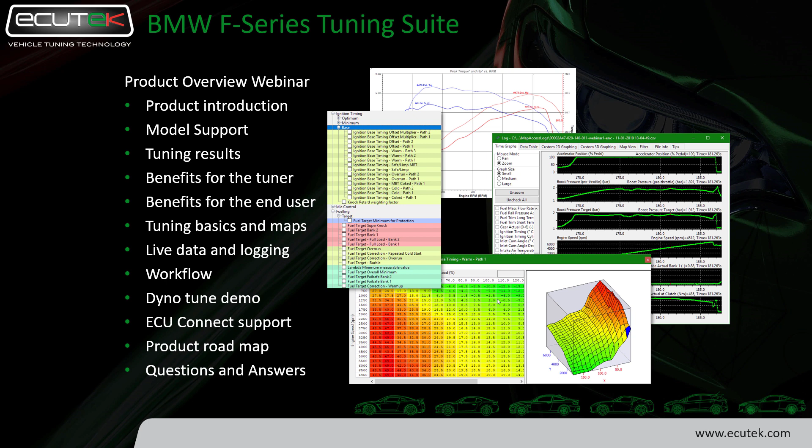So what we have is a complete all-in-one tuning solution for the F-Series fitted with the N55 and S55 six-cylinder engines, combined with the Bosch MEVD 17.2.6 and MEVD 17.2.G ECUs from 2011 onwards. The tool features ECU unlocking, ROM editing, ECU programming, log creation, log analysis and diagnostic features in one tool. We've given you clearly defined maps for tuning the cars, comprehensive 2D and 3D map editing tools. We support remote or e-tuning.

A comprehensive library of stock ROMs is available for automatic download when you install the software. You can import your existing tuned ROMs by importing the files directly or reading them from the ECU. We can compare and copy maps between ROMs. And obviously, we have a robust programming process with built-in ECU recovery should programming be interrupted.

The tuning suite supports a wide range of cars from the worldwide market, ranging from the M135i at the smaller end up to the barge-like 640. It also includes fringe models like the GT and X-Drive 35i, and obviously the halo cars such as the M2, M3 and M4 with the S55 twin-turbo engine.

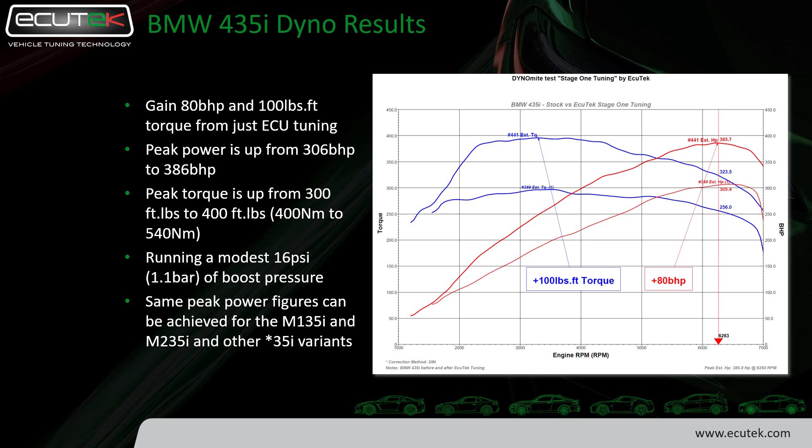On our 435i development car, we found excellent gains even in stock form. 80 horsepower and 100 foot-pounds of torque just from ECU tuning, with peak power increasing to 386 horsepower from the stock 306. Peak torque's up to a very respectable 400 foot-pounds, and we're still only running a moderate 1.1 bar of boost at peak. Typically you'll find that the same peak figures can be achieved on most of the variants, so on those cars that start off with more power from the factory, we'll have a smaller gain.

You can start tuning your first BMW F-Series within an hour of purchasing the software. If you're an existing dealer and you've already got one of our green hardware cables, you can just buy it in the web store, download the software, download the ROMs, and get going. It really is that easy.

Existing EcuTek tuners will be familiar with our all-in-one tuning approach. It's a single application that handles ROM editing, programming, logging, and OBD tools. So there's no binary file conversions, there's no hunting around with a hex editor. We can import common ECU formats for BMW from other tools. We can read the calibration data directly out of the ECU. When it goes to program, there's no messing around with checksums, that's all handled automatically. And if you're tuning the car in person, things like map tracing can make your life a lot easier.

As an EcuTek tuner, there's comprehensive email and telephone support available. As with all of our software, we provide all the stock ROMs that you need. They're stored locally and updated automatically. Tuning can be carried out 100% offline. You don't need internet access to actually tune the car, just to receive the updates.

If you're an existing EcuTek tuner, BMW F-Series is the ideal platform to start a remote tuning business. ROM files are encrypted and can be locked to a VIN or hardware license key. We update ECU security to prevent overprogramming or reading via OBD, and the programming sequence is also encrypted to prevent ROMs from being sniffed over the CAN bus during programming.

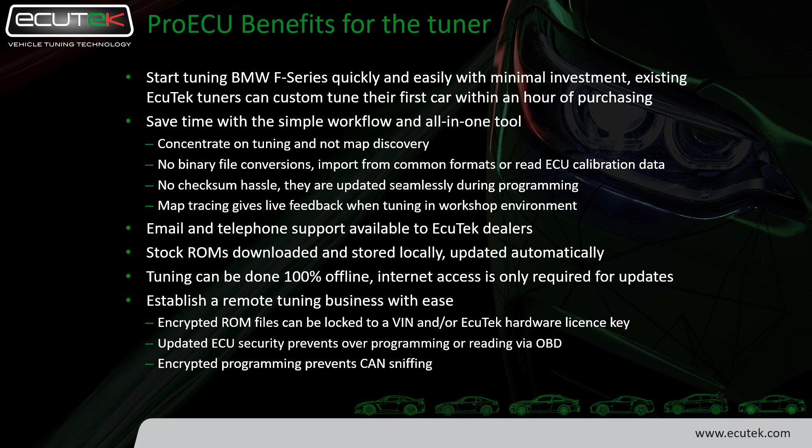If you or your customer are lucky enough to have one, then investing in EcuTek could be a great next step. They're a really good car out of the box, but with mild upgrades, they become excellent. Our M235i development car is such a good car with just a stage 1 upgrade. If you add to that some basic hardware updates, 420 horsepower isn't out of reach, and then the lighter weight 235i and 135i really compete with the M cars as they come from the factory. The already excellent M cars can be pushed to another level with just a stage 1 upgrade and even bigger improvements when you add some more hardware.

Using EcuTek, you can program a tuned ROM without invoking any tamper DTCs or changing the CVN. ECU Connect adds logging and basic diagnostic tools that can be used to validate the quality of your tune, allowing end users to build a relationship with their tuner by sending logs back and getting further map updates. As EcuTek adds RaceROM special features to its products, end users can benefit by getting updates through the lifetime of their car, and furthermore, the ECU can be completely returned to stock with minimal fuss.

The BMW ECU has a complex torque control strategy around which most of the other strategies are hung. Even things like the variable valve timing are driven by torque when you drill down. In this modern world, I'd really encourage any tuner that wants to do great work to embrace some of the modern ECU technologies. It's time to move on from thinking about only wide open throttle boost, a near fixed AFR and dumb ignition control. Let me take you through some of these maps in the initial release of ProECU.

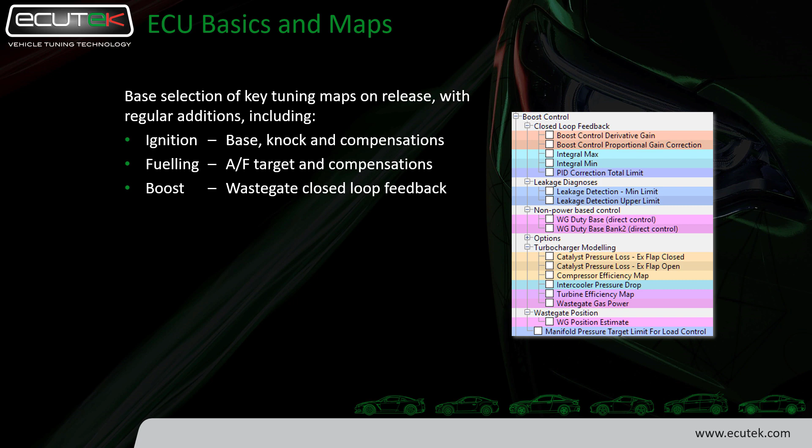So you can see that we've got ignition base timing for a number of different conditions. We've got some minimum ignition maps, and there are other compensations not shown on the screenshot on the right. Fueling, we've got basic AFR target and target compensation maps. The boost control is relatively easy to get your head around. There are some modelling based maps that you can use to influence how the boost is controlled to hit the target, but the target is largely driven by torque.

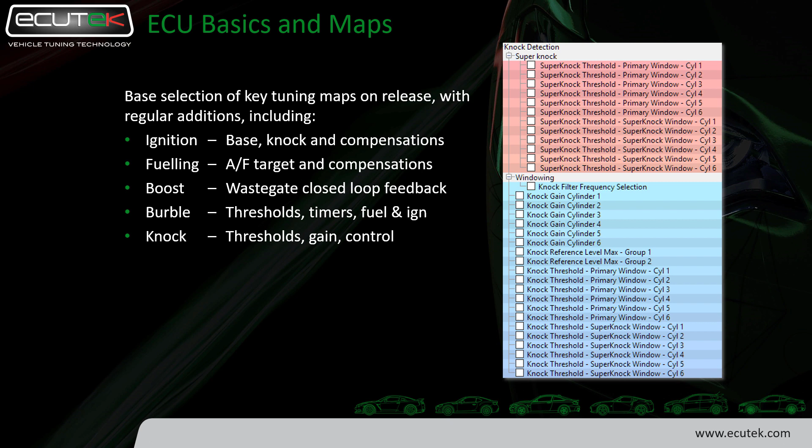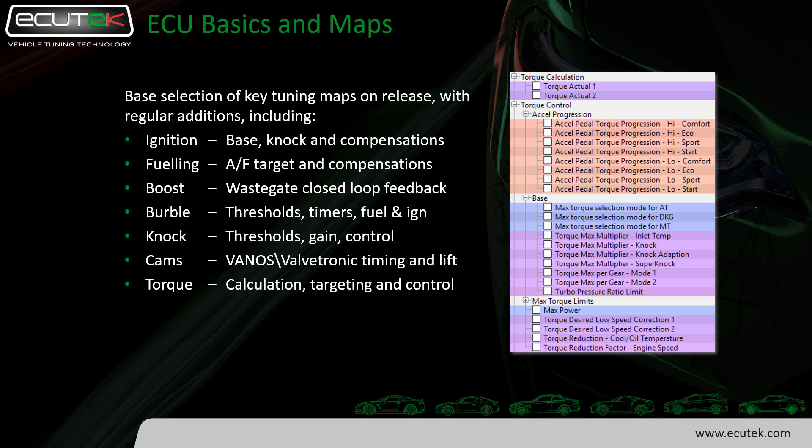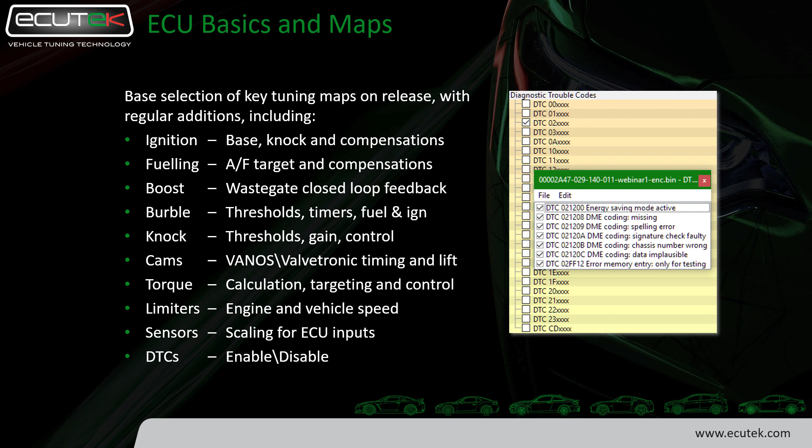Of course, there's everyone's favourite, the burble maps for pops and bangs. There's a good selection of knock detection and knock control maps. Cams are adjustable for both timing on the inlet and exhaust and lift on the inlet. Torque control is relatively straightforward on the BMW. There are a few maps that set the base demand, and then again the same concept of having compensations or adjustments to that base level. There's a standard selection of rev limits and speed limits, and we've also got some sensor scaling, and lastly a comprehensive table of DTC codes that can be switched on or off.

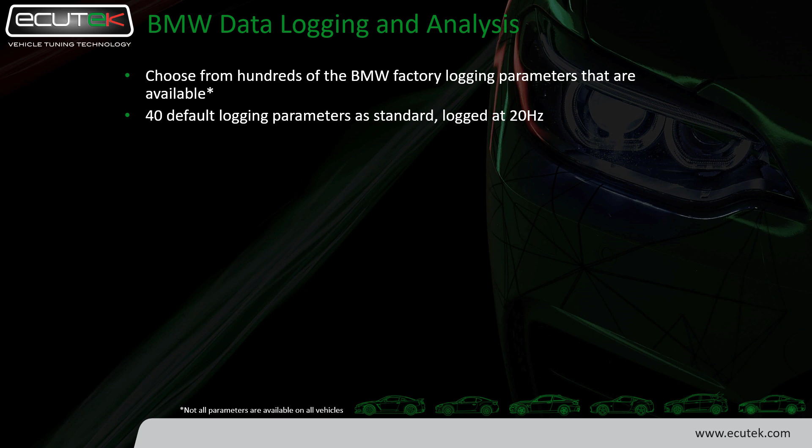As I mentioned before, as part of the all-in-one nature of this tuning solution, data logging and analysis is included. There are hundreds of parameters available, but obviously not all of the parameters are useful for tuning. So we've selected 40 default parameters as standard, and we typically get about 19, 20, 21 Hz of logging speed with that. You can data log using ProECU and a laptop, or using an iOS or Android device in our ECU Connect app. If you're using the app, it's very easy for end users to log the car and email the log straight back to the tuner without going anywhere.

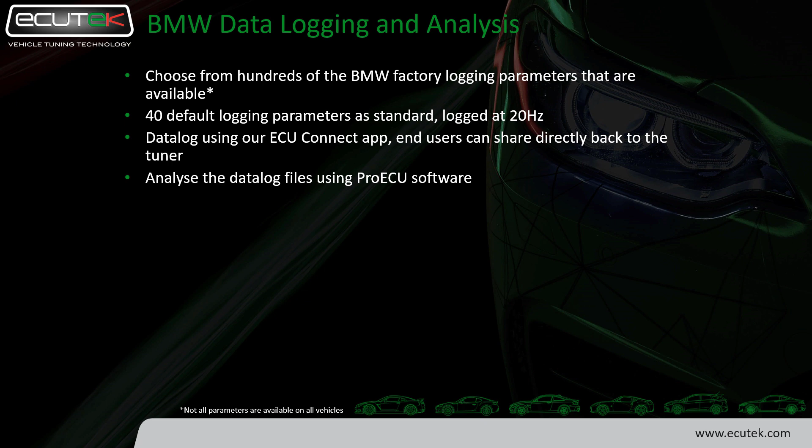The tuner or the end user can analyse data logs using ProECU, and all data logs are saved in a basic CSV format, so they can be edited with a spreadsheet or viewed in other tools such as Megalog Viewer. You can also stitch multiple log files together using the Merge Log File tool from within ProECU. Once you do get some data logs, you can view them using ProECU as table data, 2D time graphs, XY plots, 3D point fields, and overlaid onto an existing map.

We've also recently introduced tools that allow you to match a ROM and a log, so you can ensure that the data log a customer sends to a remote tuner is in fact generated with the tuned ROM that they sent out. We don't think that tuners should be IT experts. We don't require them to be ECU reverse engineers or have a depth of IT skills just to make an engine run as they want to.

Now I know this looks like a long and involved process that I've outlined for a traditional workflow, but there are a surprising number of tuners that still use this, using multiple tools to get to the point where the car is tuned with confidence. Now if you've already invested in a wide range of tools and you're from the file tuning sector and you're comfortable with this longhand approach, there's no denying that it can get the job done.

Now, I know that there are other tools out there, but none that I think offer the level of integration that we're providing. And I know that there are tuners out there still using this long form workflow and looking to consolidate it into a streamlined process like the one EcuTek provides. I won't bore you with all the details of the hardware, but if you're doing it this way or you recognise a lot of the steps, then there probably is a better way for you.

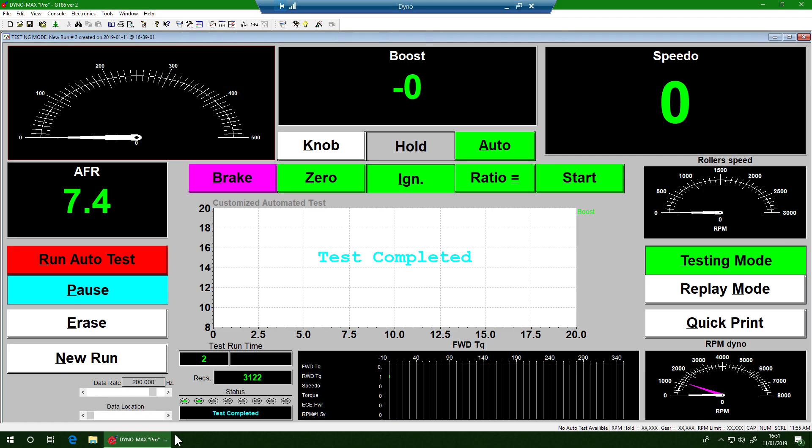Close that. The car's had a chance to run after the pull. Switch the ignition off, turn off map access, and that's the first half done. Let's have a quick look at the dyno results. There we go. Estimated horsepower, in this case at the flywheel or crank, 328 horsepower, 328 foot-pounds of torque. That looks fine.

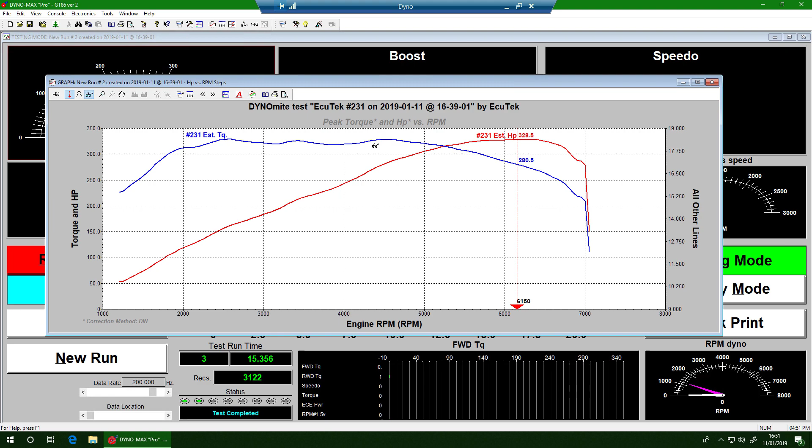Now that we've unlocked the ECU, we're going to create a basic tuned ROM file to program back into it. So I'm going to open ProECU, and then we go to File, Open ROM File, scroll down, choose the correct ROM, click on Open. See the map tree shown here on the left. We can increase the size of that. We can go to View, increase font size, or we can use the hotkey Control-Alt-I, or we can hold down the Control button and use the scroll wheel of the mouse.

So I'm going to expand maps by function, go to Torque Control, we'll open Base, scroll down a bit, Max Torque Limits. Increase the size of this window so we can read all the map names. So the BMW ECU uses these base and max values as the basis for all of its torque target calculations. So we'll open Torque Max for AT. This car has the 8-speed automatic transmission.

Select all the output values. I'm going to use the Control P for percentage hotkey. Enter 120. And you can see that it's scaled all of those values up by 20%. I'm going to save that. Then we'll close it.

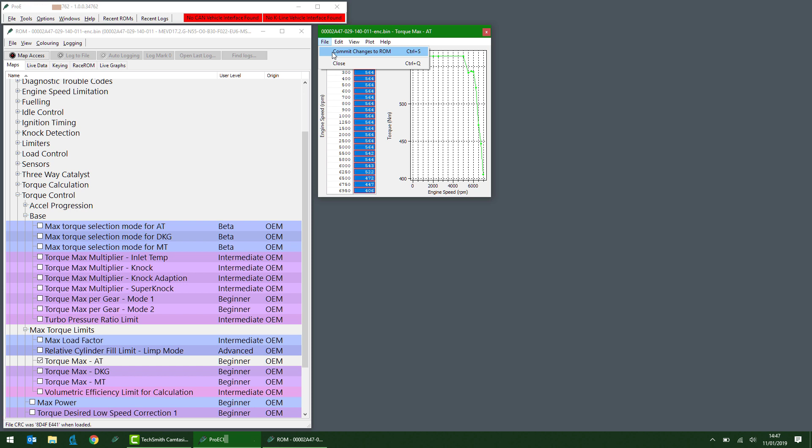Then we're going to do something similar for the torque max per gear, mode 1 and mode 2. I'm not going to go into details of what mode 1 and mode 2 are, but there are two slightly different modes which are determined by some other maps. But for the most part we can just make the same changes to both the maps. They're identical in the stock ECU.

So I'm going to use Control P hotkey, 120, OK. Now we're going to horizontally interpolate across the map. So select the region. Actually we'll go from here and use Control H, and then you can use the hotkey Control S to save. Before we close it, I'm going to copy the entire map to clipboard, which we can do from the Edit menu, or use these hotkeys here, and then paste it into here. For this I'm going to use the hotkey Control-Alt-V, and then again Control S, and then close both maps,

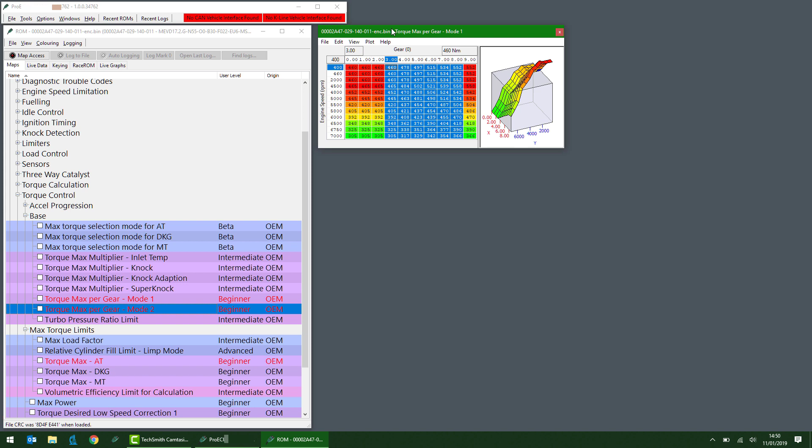Control Q, Control Q. So that's modified our base torque targets, which set the basis for the torque calculation, and generally they represent 100% of the desired torque. And we can open the Accel progression maps here, which I'm not going to change this time, but let's have a quick look.

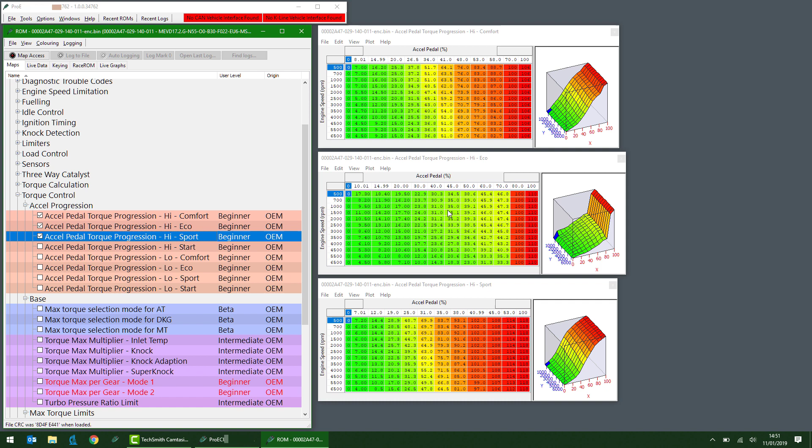And you can see that you've got comfort mode, which is kind of your normal mode as set on the center console of the car, and then you've got an eco mode and the sport mode, and you can see the differences in the shapes. And this is how the different driver feel is created for each of those modes. But for the moment we're just going to leave those standard. However, for a decent quality tune I would recommend that these are edited, and we're going to cover those separately in another video.

So we've increased the torque, but it might be limited elsewhere by the ECU, especially in terms of airflow or load. When we go to load control, you can see we've got load limit under knock correction, load limit knock correction in super knock. Open this first one, just expand this a little bit so you can see the whole axis title. And what you can see is that this x-axis here, which goes from minimum of -13 up to only -3, it says total knock limit adjustment.

It's not knock control retard per se, but the total amount of change from the base value, and that includes temperature compensations, knock control, load limit compensations. Typically when everything's running well, we're going to be up here in this -3. Even if the total knock limit adjustment is perhaps 0, this is where we'll be on the map. And you can see that these are load limits, and the units here are percentage of cylinder fill. So we're just going to increase these by the same 20% that we added to our torque.

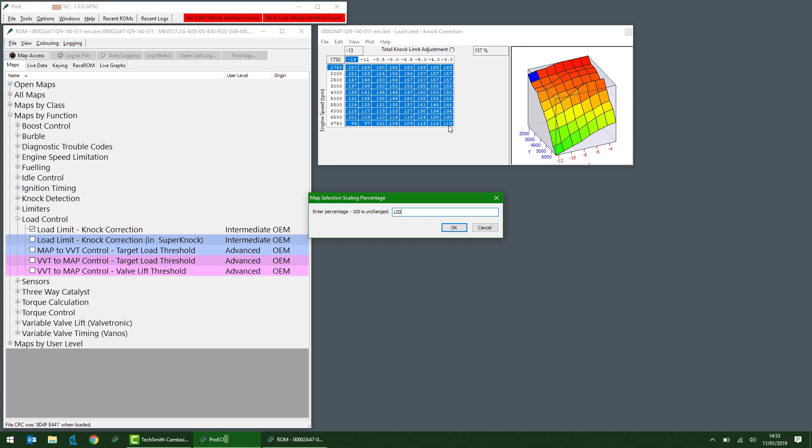Not Control A, we'll do Control P, 120%, Control S, Control Q. We've got a similar table with the SuperKnock suffix. We'll have a look at that. And you see that that's quite a different shape. And if the ECU determines that it's in a SuperKnock situation, I'll explain a bit more on that later, you can see that it's going to keep a low load limit, especially at low RPM.

So the SuperKnock is a BMW term, very similar to the low speed pre-ignition, those kind of phenomenon, but in terms of what the ECU can determine, it uses a separate knock threshold and a separate knock window from the main knock control. If those conditions are met, it determines that it's in a SuperKnock condition where it can do additional limitation. So you can see here particularly low load limits at low RPM.

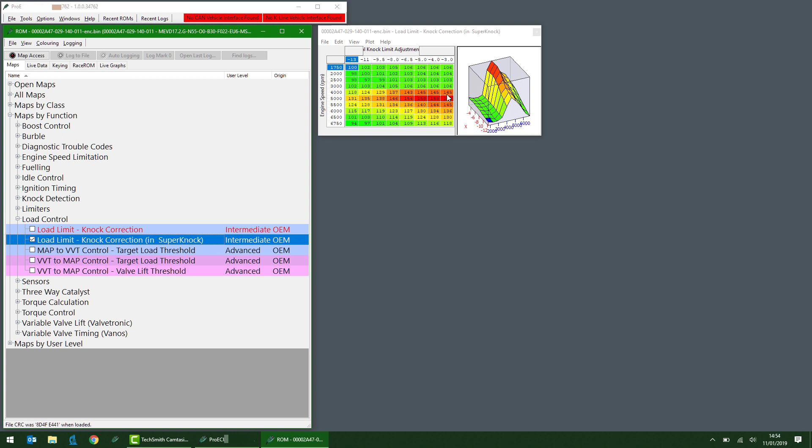Then we're going to raise these higher limits, and maybe we'll just go 110%. But actually I'm thinking we'll be a bit more conservative. And we'll select this area here, do Control Z. That returns it to the original values. Then we're going to interpolate out to where we've got this minimal correction using Control H again. So you can see the highlighted cells, just a small portion of this map.

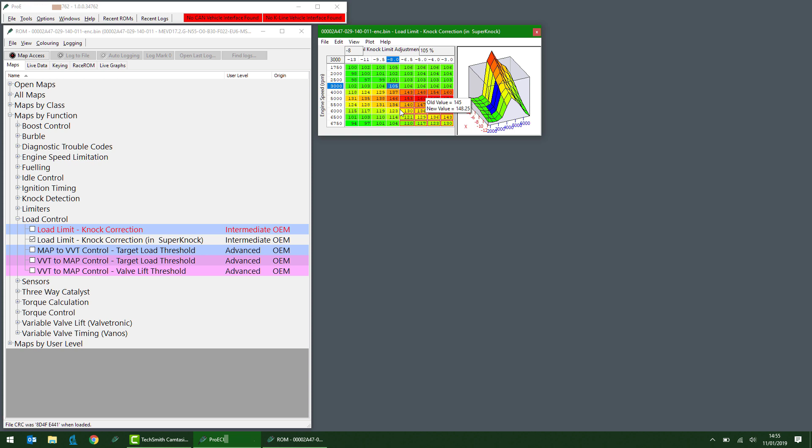We leave the low RPM load limits in place, where some low speed pre-ignition could potentially do more damage to the engine. So I'm going to save that. Control S, Control Q. Then I'm going to go back into some maps in the torque control category. We've got the turbo pressure ratio limit, which may seem not very torque-like, but it all feeds into the same torque strategy. So you can see it.

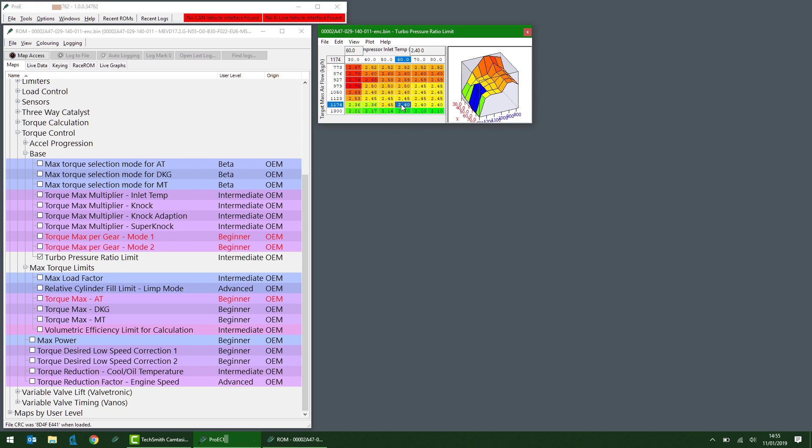This is the pressure ratio, so the ratio of the pressure on the output versus the pressure on the input of the turbo. Typically if you were running, say like we have here, 2.4, that would be roughly equivalent to 1.4 bar of boost at sea level. So I'm just going to add a small amount to this, 0.2. Click on OK, Control S, Control Q. Those numbers there, they ultimately get turned into both a load limit and a torque limit.

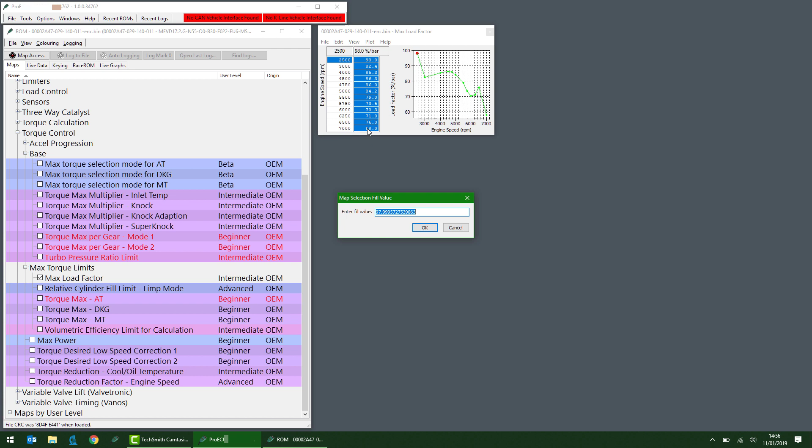We'll also look at this max load factor, which in simple terms is a relative VE number used as a limit for calculating torque limits, another stage in the overall torque calculation. Now depending on what changes you make to your other airflow and load limits, you might not need to change these, but I'm going to do something that's fairly typical. We're going to fill those, so I'm going to go Control F this time, just fill them with 99. Control S, Control Q. So now we've raised some torque targets, some load limits, some airflow stroke load limits.

We're going to make some brief changes to the fueling. Go to the fueling category, fuel target bank 1. There is only one bank on this engine, but the same map structure exists for the S55 with 2 banks. And we're going to make a very, very subtle change here. What I'm going to do is copy these values in, say here, Control C, and I'm going to paste across there. You notice there's a different size. We do Control V, we can then stretch. See, now we've got the same value right across. I'm not necessarily recommending this is the ideal change to make to this car, but I know from experience that it will be relatively safe for the purposes of a test. Save that, close that.

We go to ignition timing, base, and you can see we've split the ignition timing maps into a number of different sort of subcategories by their title. The one that we're really interested in is ignition base timing warm path 1. I don't want to go into too much detail about what path 1, path 2 and path 3 are, but essentially they're different pathways through the code for certain quite specific conditions. And you'll see those crop up for a number of different strategies, and for each strategy, each path number is specific to that strategy. So path 1 for ignition is not necessarily the same one as path 1 for variable valve timing.

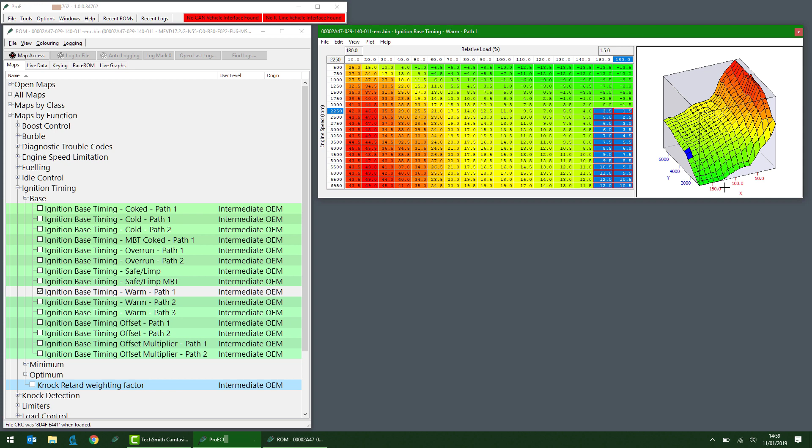Now, based purely on some experience I have with this car, and the fact that we're running this car on super unleaded, I'm going to add 1 degree of timing. Control A, 1, enter. You can see the effect of that over here. Save that and quit.

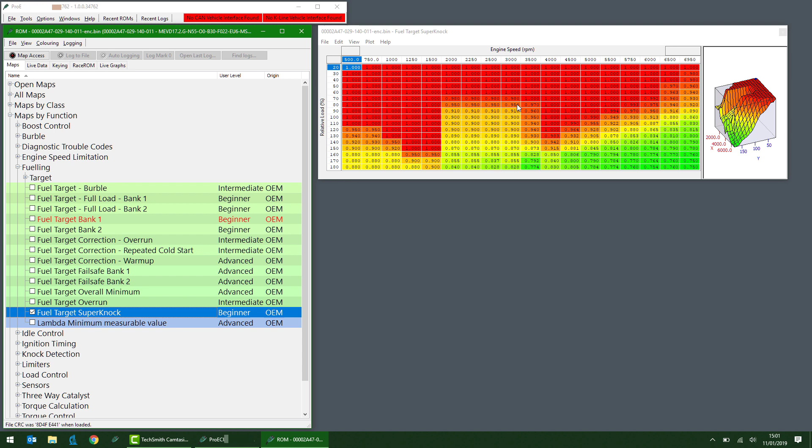We can also go back to the fueling. There's another fuel map we might be interested in, which is the fuel target in SuperKnock. It's the same SuperKnock condition that we saw for the load limit. And you can see here that if the ECU does detect SuperKnock, it richens up this low RPM area considerably, and you can also see that it has a slightly richer target at the higher end, although SuperKnock or low speed pre-ignition, as the name suggests, tends to be a phenomenon most affecting the low speed running of the engine, which is why we see this here. Now, I'm not going to lean this out. I don't think there's anything to be gained by adjusting this. We shouldn't really be in SuperKnock, and if we are, we certainly don't want to reduce the ECU's capability of mitigating that knock. So we'll close that.

So now I'm going to save a copy of this ROM file. So go File, Save ROM File As. We're just going to put a little suffix in the name. We'll call it Webinar 1-ENC. With that ROM file saved, we're ready to go back to the dyno, program the car, and test to see what our results are. So we need to go to Tools, Program an Engine ECU, and click on Program ECU.

ProECU prepares the ECU ready for programming. And we'll rejoin this towards the end. And the ECU program is complete. Click on OK. Close the programming window and cycle the ignition off. Back on. Let's see if we can start the car. There we go. ECU programmed.

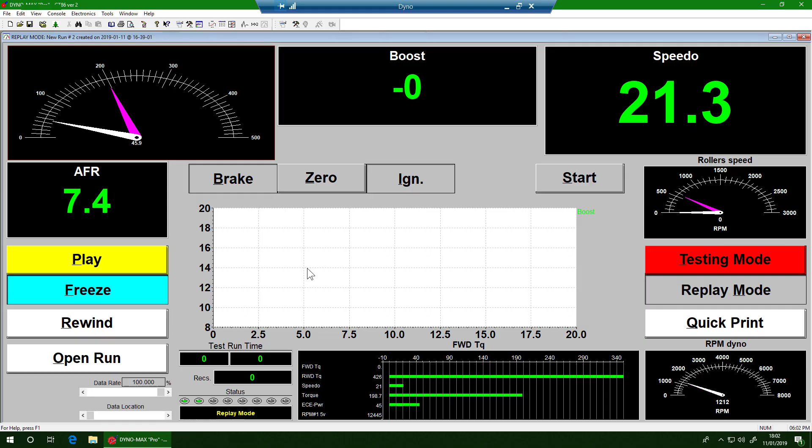So I've restarted the fans for the dyno. Have the engine running. Click on Live Data. Zoom in a bit. Click on Map Access. You can see that we've got live data returned to ProECU. Now I'm going to click on Log to File again. Go back to the dyno. Prepare to do another run exactly the same way.

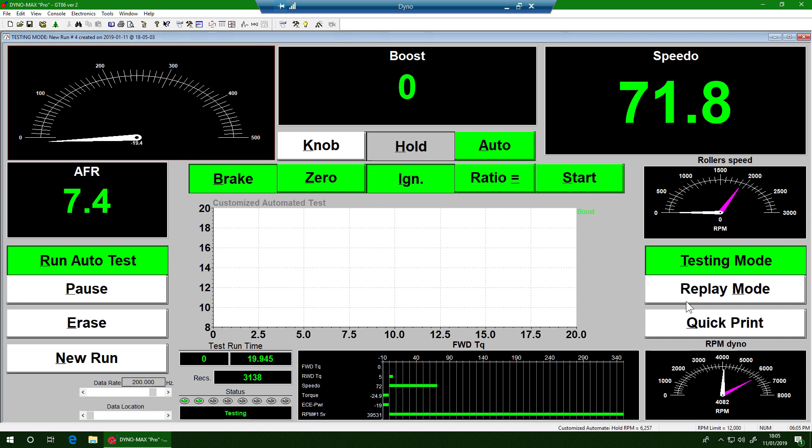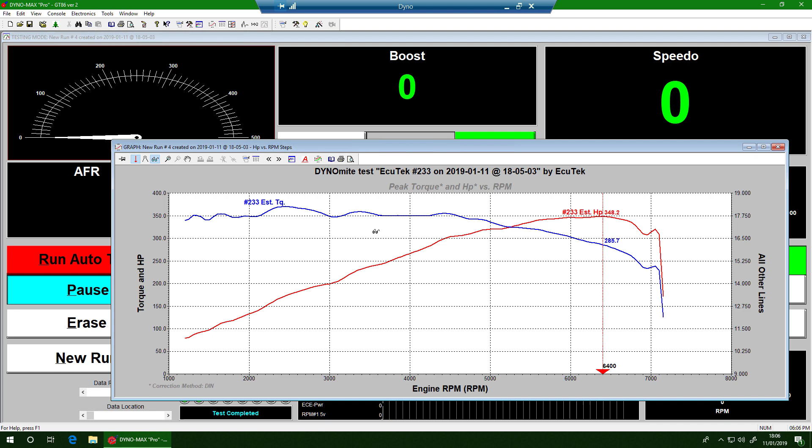So there we go, some minor adjustments. We've managed to make a small gain in the power and a significant gain in the torque. So now that we've finished on the dyno, let's do a quick comparison of the results. I've combined the two dyno graphs into one, so we'll flip over to the remote desktop of the dyno PC.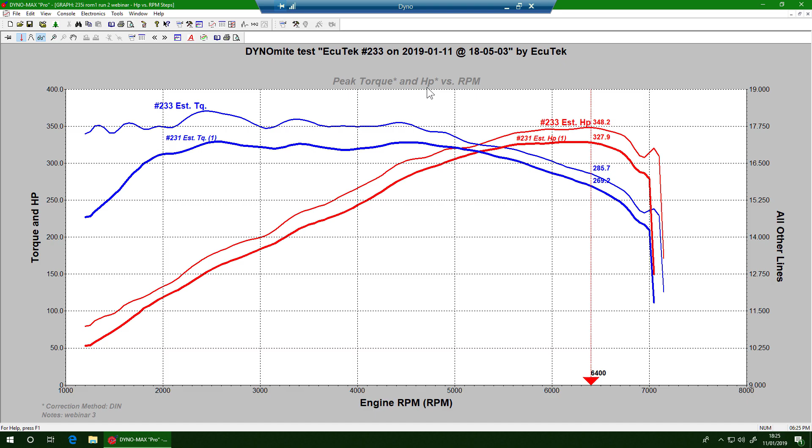So we've had a brief look at the dyno results from the stock ROM and the modified ROM. Let's have a look at the data logs too. We can open up an Explorer window, go to Map Access Logs in the EcuTek folder, and we'll open up this log here for the modified ROM. We can drag that straight to the ProECU window to open it.

As before, we can go to time graphs. You can see we did 2 runs. Let's go to the second run on the dyno. You can find that easily. So we'll uncheck all of these parameters, look at accelerator position, engine speed, and we'll start with some fueling checks. We'll look at the trims and lambda and target.

So you can see that the short-term trim is very tight, plus or minus about 2%. Disappears off a little bit at the end where it starts to richen up and the ECU pulls it back in, but very impressive for an OEM ECU. So lambda actual 0.85, yep. Okay, we've satisfied ourselves that the trims are okay, the lambda's okay. Let's have a look at fuel rail pressure, nice and flat.

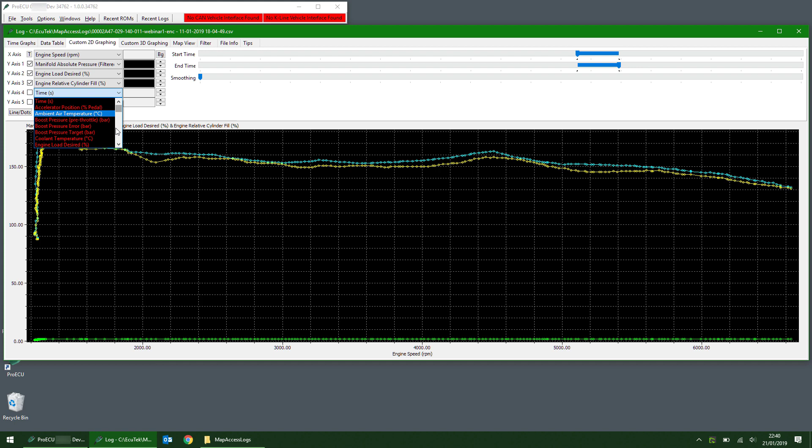So let's go to custom 2D graphing. Just tidy this up a little bit, and we can have a quick look at the wastegate duty. Still nice and manageable. Some headroom there. Something of interest, we've got no knock conditions detected there. Let's have a look at engine load desired versus engine relative cylinder fill, and then bring the throttle up. And let's make this versus time.

And so yeah, you can see here as the desired load falls away a little bit, it's here that the throttle interacts. And again, any time that the two meet, you see this quite sudden closure of the throttle, and then as the actual drops away and falls away below the target, the throttle is very, very slow to come back in. Still not a bad job, but that's something that we'd want to address if we were tuning this car for a customer.

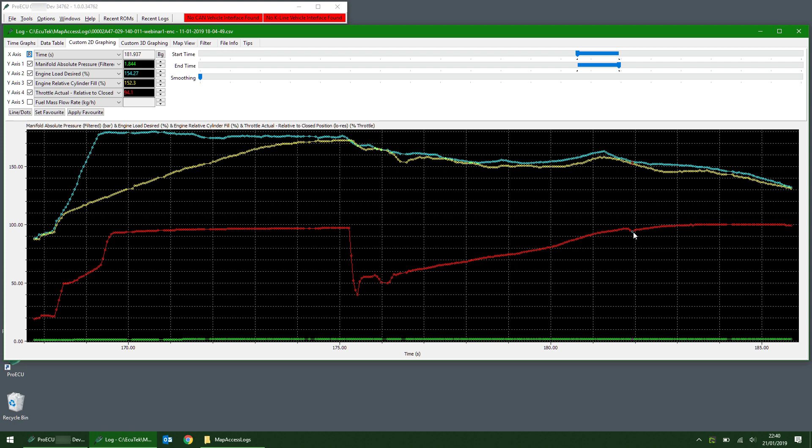Now what we want to do is, that's all well and good, but we can quickly overlay these results with the log of the stock ROM. So let's load, drag our modified log, stock log, merge the two, and we'll create a merged 235i, close that, and let's have a look at this log now. We can drag it the same way as we did before. Let's close that. Look at time graphs, and here we go.

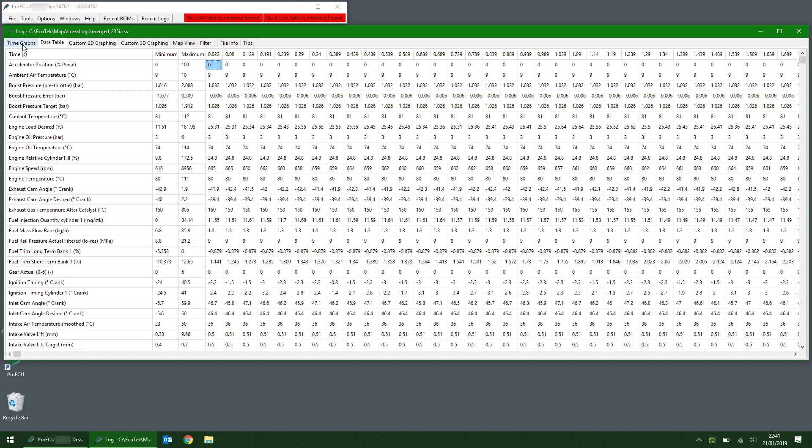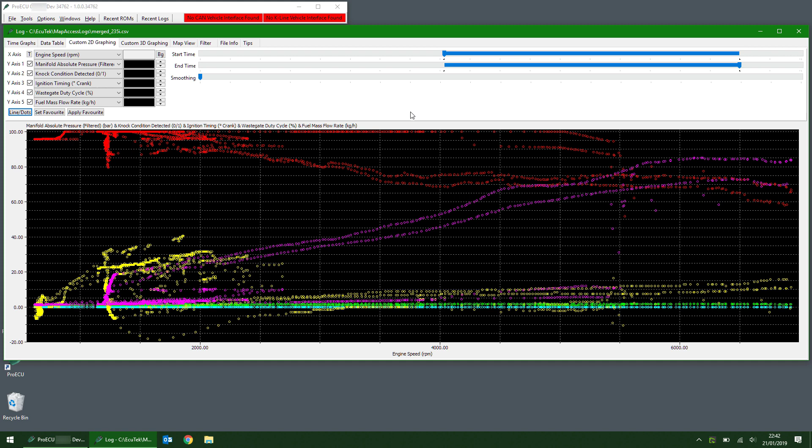Here's our two pulls from the modified ROM, and here's the pull we did earlier with the stock ROM. Now if we zoom in here, go to custom 2D graphing again, we can actually see the change in mass airflow. Let's have a look at boost pressure. So you can see the modified boost pressure up here and the stock down there.

We can do the same with torque actual. Torque desired for load. So again, it's a moderate increase, which is all we're after in this demonstration. That concludes this brief look at these data, but we'll look again in much more detail in our Stage 1 tuned ROM walkthrough coming soon.

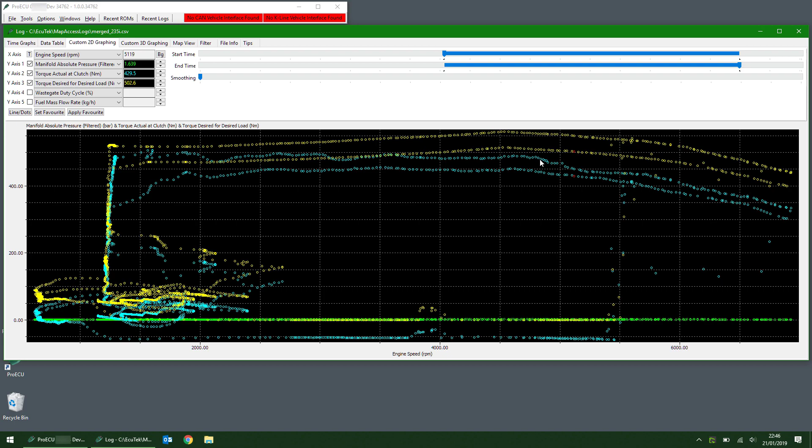Having been through the tuning process, I'm going to return the ECU to stock. The ignition is off at the moment, so now I'm going to turn the ignition on in the car, go to Tools, Detect Vehicle. We're going to go to the ECU Unlock tool. Click on Query ECU. It gives us information on the ROM file that's in the ECU.

So now we're going to load the stock ROM. Since it's already determined which is the stock ROM, it's pre-filled that for us in this dialog box. We just click on Open. It's given us some information about the changes that it will do to the bootloader to unlock the ECU, if that's what we want to do. It tells us that unlocking this ECU will consume 300 flash points, but that putting the ECU back to stock is free of charge, and that's what we want to do now. So we just click on Back to Stock.

You can see it's backing up the vehicle coding to put back in the ECU later. Okay, now the process has begun properly. It tells us that the ECU contains an EcuTek bootloader, which it's going to erase. Now it's going to start reflashing the stock contents of the ECU, beginning with the bootloader.

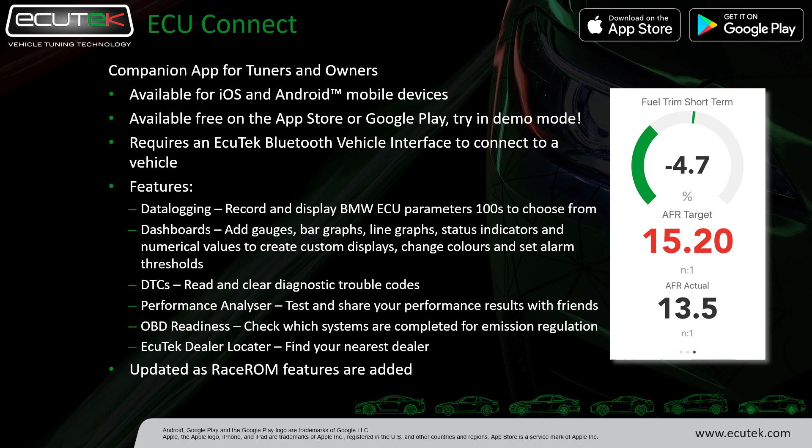So I just wanted to go over our product roadmap for 2019 on the BMW platform. Typically when EcuTek first releases a product, it's reasonably basic, and then over the period of the first year we add increasing amounts of functionality. So in the first quarter this year, we're looking to add the S55 twin-turbo platform, which is obviously the M2 Competition and the M3 and M4. There'll be more and more map updates, so adding a more comprehensive spread of tuning maps to the product, and then continuing support for adding more and more ROMs to cover more and more models. Along the way, we'll also be hoping to take feedback from our dealers and end users to improve the overall user experience and usability of the software.

Starting in Q2, we'll be looking at our RaceROM feature set, so that's going to be on-the-fly map switching, not stop, reflash the ECU, change the map. Live map switching, typically we enable map switching either from the ECU Connect app or via things like cruise control buttons. We're also going to add comprehensive flex fuel support with input from a content sensor, so not just fixed ethanol content values with different maps, but a fully variable system using an ethanol content sensor that we hope to hook in via CAN bus, which means we do away with any restrictions from not having any spare inputs on the ECU.